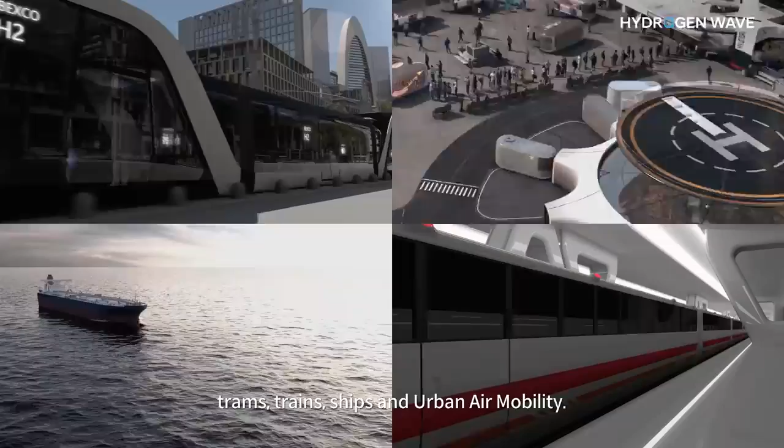In recent years, countries and companies have actively pursued this change by making bold investments in hydrogen infrastructure. Then, what does Hyundai Motor Group's vision for a future hydrogen society look like? Our vision covers not only passenger and commercial vehicles, but also various types of transportation, such as trams, trains, ships, and urban air mobility. Our vision is to apply hydrogen energy in all areas of life and industry, such as our homes, workplaces, and factories.

The goal is to make hydrogen readily used for everyone, everything, and everywhere. With this breakthrough, we aim to help foster a worldwide hydrogen society by 2040. In particular, we will proactively respond to climate change through our hydrogen solutions, starting with the commercial vehicles sector, which emits relatively large amounts of CO2.

Going forward, Hyundai Motor Group will launch all our new commercial vehicles, such as buses and heavy-duty trucks, as hydrogen EVs and battery EVs in the global market. By 2028, we plan to become the first global automaker to apply fuel cell systems to all commercial vehicle models.

Using these hydrogen commercial vehicles, we will promote the complete transition of Korea's public transportation and logistics systems to hydrogen-based solutions. This will be a good model to follow for countries around the world. To achieve this, we are planning to introduce a new fuel cell system in the near future at a reduced price and volume, with significantly improved durability and output.

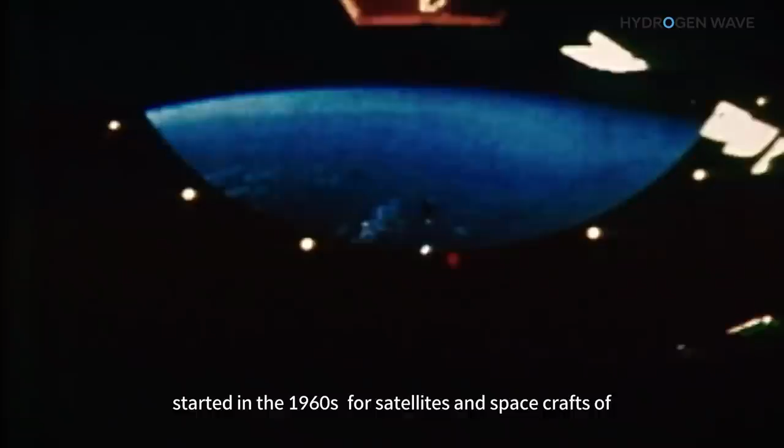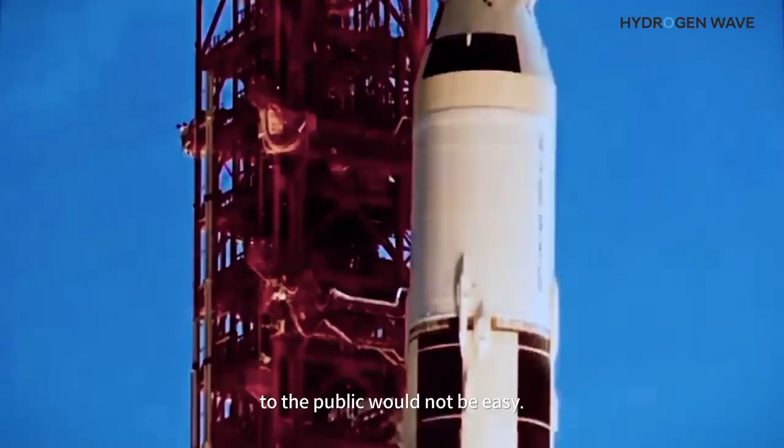Hello, this is Albert Biermann. When did the hydrogen fuel cell start its career? The first remarkable application of hydrogen fuel cells started in the 1960s for satellites and spacecraft of the Gemini and Apollo programs. We expected that bringing hydrogen fuel cells to the public would not be easy.

Nonetheless, Hyundai Motor Group anticipated the future potential of hydrogen fuel cells at an early stage. In 1998, Hyundai started to develop a hydrogen fuel cell car and has made continuous efforts to achieve significant progress to the present day. In February 2013, the Tucson FCEV was released for the first time in the world, opening the door to the mass production of fuel cell EVs.

Then, in 2018, Hyundai released the next-generation hydrogen fuel cell SUV, Nexo. Our Nexo is ranked as the FCEV with the most sales worldwide. But we didn't stop there—we plan to use our fuel cell EVs in various fields.

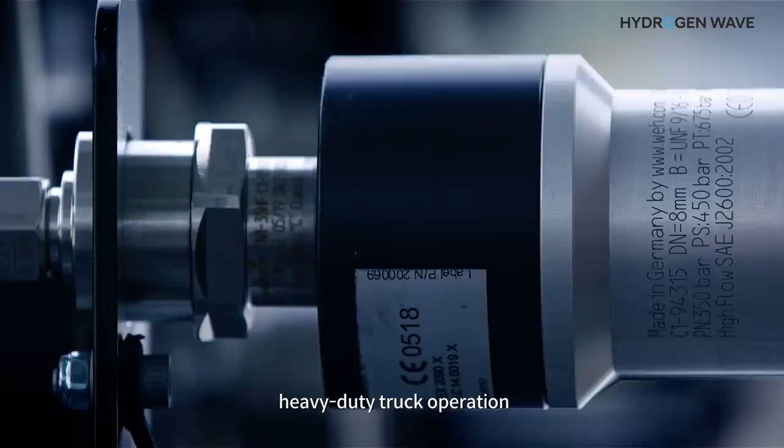First is the key to logistics: trucks. The big challenges in long-haul, zero-emission, heavy-duty truck operation are refueling time and range. The zero-emission powertrain of our Xcient fuel cell truck consists of two Nexo fuel cell systems, a hybrid high-voltage battery for energy recuperation, and a powerful electric motor.

Our Hyundai Xcient fuel cell truck is the first mass-produced heavy-duty fuel cell truck in the world and started operating in Switzerland last summer. Our fleet keeps growing, and we currently have 45 Xcient fuel cell trucks on the road. They cover over 210,000 kilometers of zero-emission operations each month and avoid an equivalent of over 130 tons of CO2 every month.

We are remotely monitoring each of our Xcient fuel cell trucks like a Le Mans race car, using our latest smart vehicle monitoring technology. So far, my engineers are very satisfied with the performance, the efficiency, and reliability.

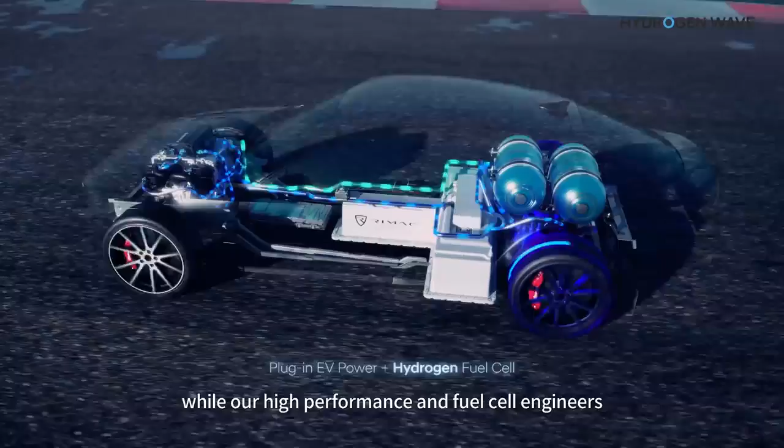So, we decided to collaborate with Rimac Automobili, in which Hyundai Motor Group invested in 2019. For this Vision FK prototype, we developed the power electric system with Rimac, while our high-performance and fuel cell engineers developed all other systems of the Vision FK prototype.

Here's another use case for hydrogen. Production, storage, and transportation convenience are important for the widespread use of the hydrogen fuel cell as an energy converter and power generator.

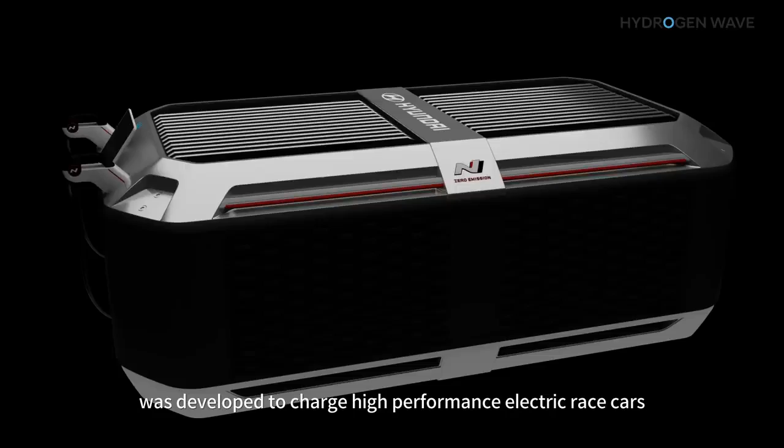This is our first H2 portable hydrogen fuel cell power charger. This powerful zero-emission charger was developed to charge high-performance electric race cars that are participating in electric touring car racing, the ETCR.

Infrastructure and temperature independency, immediate and dynamic power generation, zero emission, and high reliability also play a key role in producing emergency electricity at remote and sensitive locations where a power supply is difficult.

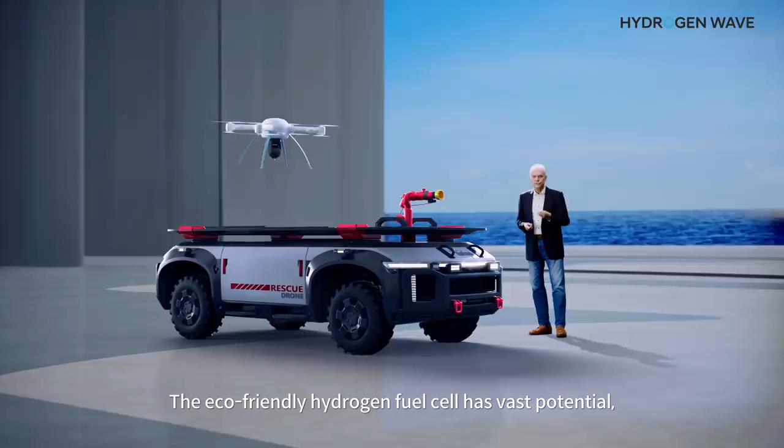Hyundai's hydrogen fuel cell technology is not limited to vehicles. This is an eco-friendly tram that uses hydrogen fuel cells. There is also a rescue drone that can extinguish fires and save lives. The eco-friendly hydrogen fuel cell has vast potential for use in several next-generation forms of mobility, such as trams and UAMs.

Hyundai plans to develop hydrogen fuel cells so that they can be applied to various mobility devices beyond passenger and commercial vehicles. Now, shall we look at the next generation of fuel cell system technology that Hyundai Motor Group is developing? Sehun, please, now it's your turn.

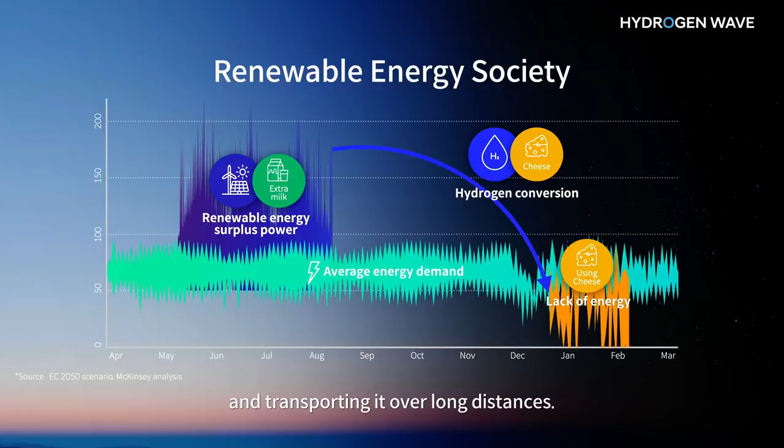My good old Japanese friend, Professor Hirose, once told me that nomads preserve milk as cheese left over from the summer and use it as a milk substitute during winter. When a renewable energy society is established, hydrogen will play a similar role to cheese. Converting excess electricity generated by solar or wind power into hydrogen will be very useful for storing large amounts of energy and transporting it over long distances. So electricity is like milk and hydrogen is like cheese.

See what I mean? Countries around the world are looking to use hydrogen as an energy alternative for a global carbon neutral society. European countries and the United States have boldly announced visions for hydrogen economies and are supporting infrastructure development in transportation and manufacturing. But many people still wonder about hydrogen technology and are skeptical if it could really be used in everyday life. Today, let me show you that fuel cell is a proven technology that can deliver the benefits of hydrogen to people around the world in various fields.

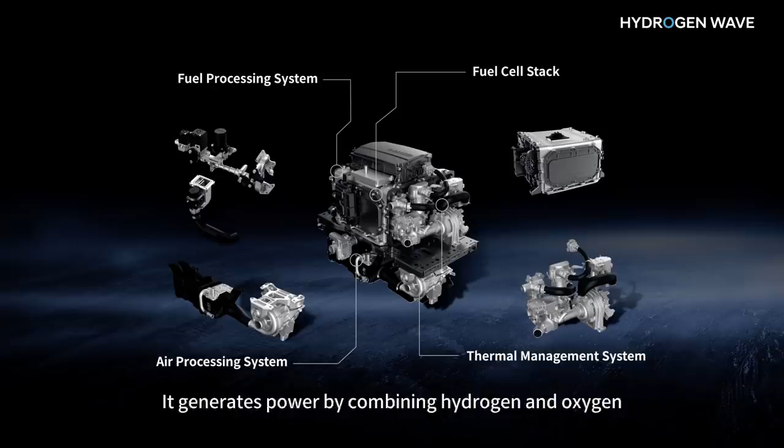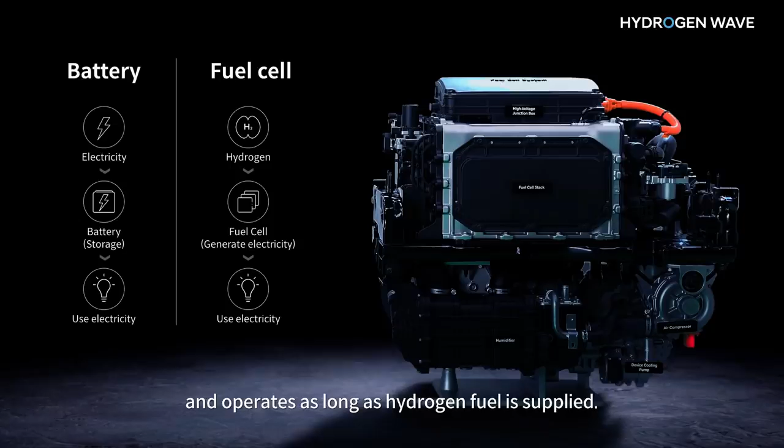Basically, a fuel cell is a power generator, like an engine. It differs from a battery, which stores electricity. A fuel cell system consists of a fuel cell stack that generates electricity, a hydrogen supply system, an air supply system, and a thermal management system. It generates power by combining hydrogen and oxygen, similar to the engine of an internal combustion vehicle, but without the carbon emissions. Unlike a battery that passively stores energy, a fuel cell system produces energy through chemical reactions and operates as long as hydrogen fuel is supplied.

The science is simple. Fuel cell is just a reverse reaction of water electrolysis that many of you learned in school. As recently as 15 years ago, many people still had doubts about hydrogen fuel cell technology. Its success depended on miracles in 4 areas: hydrogen production, hydrogen storage, fuel cell technology, and infrastructure. At that time, I fully agreed that resolving these 4 challenges would not be easy. However, since then, Hyundai Motor Group has undertaken the challenges and hasn't given up.

Today, clean hydrogen production is one of the most promising means for successfully achieving the European Green Deal, and gigawatt-scale projects have already been announced. Recently, the EU and US announced their plans to support the establishment of hydrogen refueling infrastructure. At least for long-haul commercial trucks, there is consensus that hydrogen and fuel cells will offer the best alternative to diesel powertrains. We are now at the point where we can confidently show you our vision for realizing a global hydrogen society.

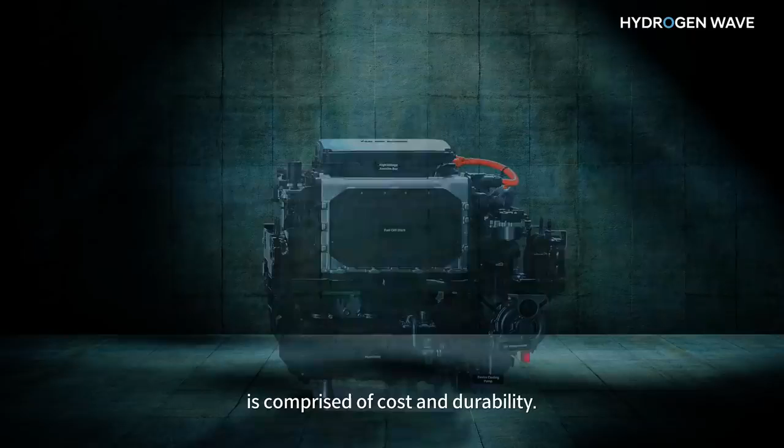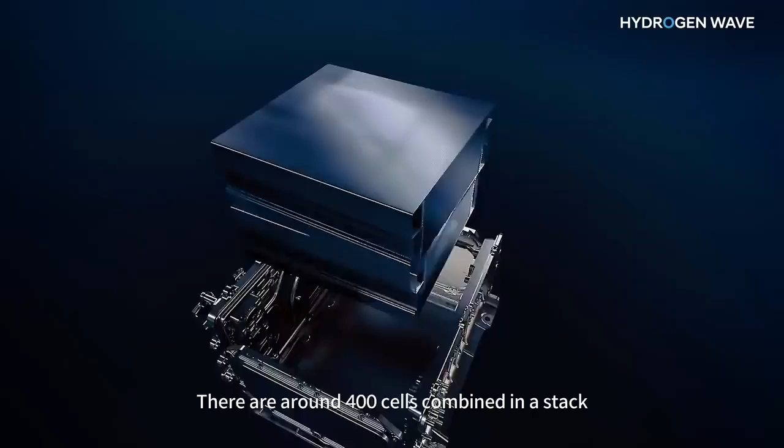The core competitiveness of fuel cell technology is comprised of cost and durability. The most important part for cost reduction is the stack. There are around 400 cells combined in a stack, and the cost of this part accounts for the largest portion. The structure of a fuel cell is shown in the figure.

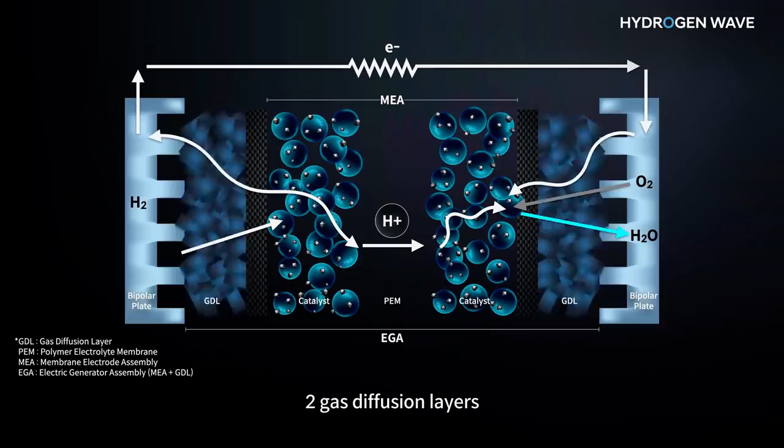The cell consists of 2 bipolar plates, which provide flow channels for hydrogen and oxygen and support the structure of the stack, 2 gas diffusion layers, and a membrane electrode assembly, called MEA. MEA forms the core of a fuel cell and is a key component that generates electricity by causing a chemical reaction between hydrogen and oxygen. Reducing the cost of these components is the key to cost competitiveness.

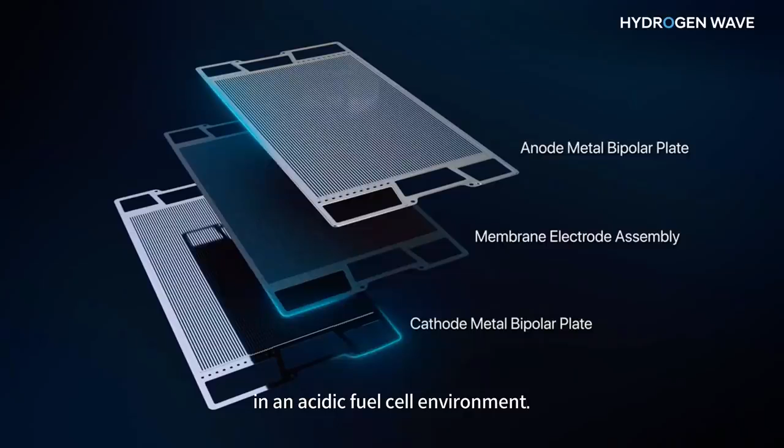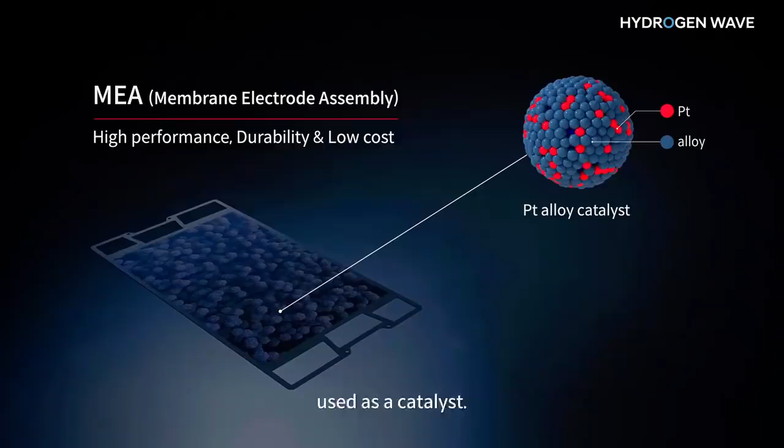In the case of bipolar plates, we have reduced the price by replacing the graphite materials with stainless steel. There are worries that stainless steel would corrode and would not last long in the acidic fuel cell environment. But after more than 10 years of development, we are successfully using stainless steel, even without special coating, for cathode bipolar plates. I still hear people saying that fuel cells are expensive because they require a large amount of platinum. That was true 10 years ago. But actually, platinum is not the major cost factor now, and we are steadily reducing the amount of platinum used as a catalyst. Let me show you how the cost of the fuel cell system has decreased.

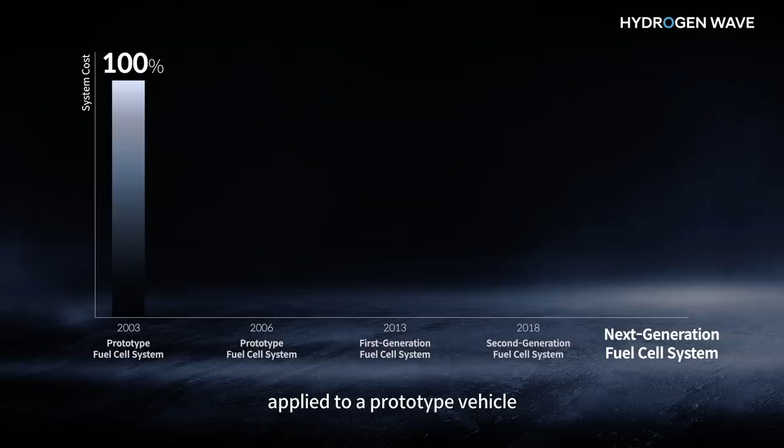In the past, the cost of a fuel cell vehicle was extremely expensive and was notoriously called a $1 million car. For example, the cost of a fuel cell system applied to a prototype vehicle in early 2003 was triple the price of my house in Seoul. However, in 2006, the cost was reduced by half.

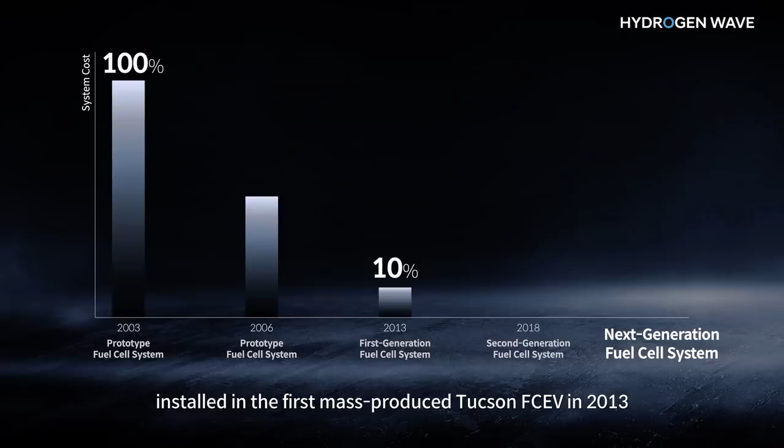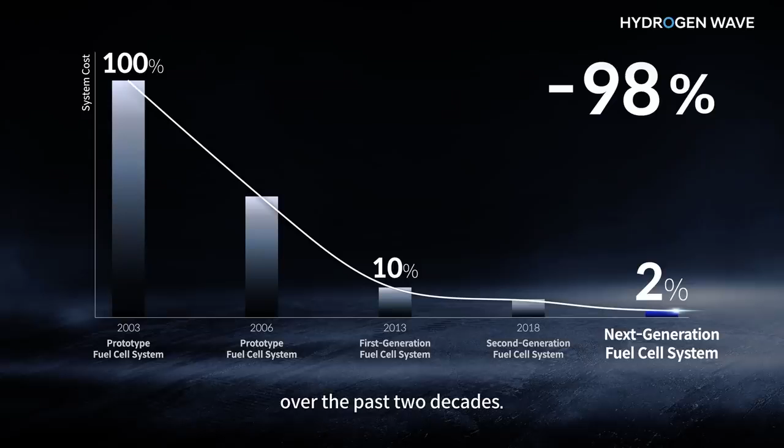The cost of the first-generation fuel cell system installed in the first mass-produced Tucson FCEV in 2013 was reduced to about 10% of the first model developed 10 years before. As you can see in the graph, fuel cell costs have been reduced by nearly 98% over the past two decades.

However, the fuel cell vehicle market is still at the early stage of development. Only 10 to 15,000 fuel cell vehicles are produced per year, and we are not yet benefiting from economies of scale. In comparison, there are 4 to 5 million EVs and nearly 100 million ICE vehicles produced per year. So we still have work to do.

Our goal is to achieve cost competitiveness comparable to that of EV batteries by 2030. I also want to point out that durability improvements are progressing at a fast pace. Durability of a fuel cell system depends on various chemical conditions, which makes durability more difficult to ensure.

During 2004 and 2009, the US Department of Energy launched a fuel cell vehicle demonstration project in order to verify the durability of fuel cell cars. The average durability of the fuel cell stacks at that time was only 821 hours, which is only 1.5 years of durability. This was another reason why people doubted that fuel cell technology could be commercialized.

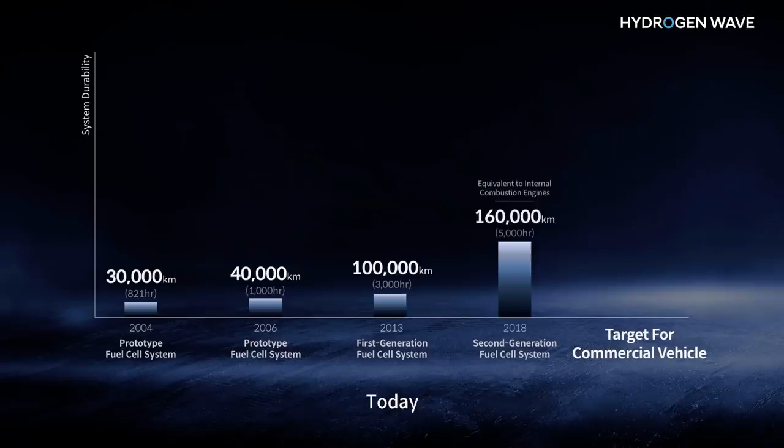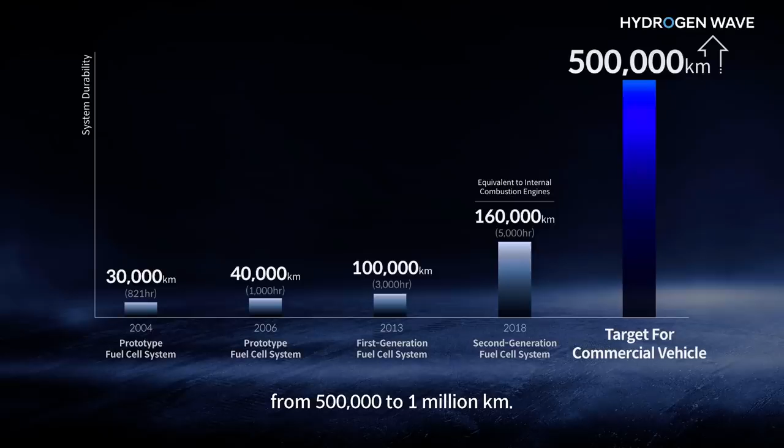Today, the industry standard of durability is 5,000 hours, which corresponds to a 10-year life cycle of passenger cars. For commercial vehicles, the durability requirement is much tougher, from 500,000 to 1 million kilometers. I'm sure this requirement can be achieved in the near future by using better materials engineering and operation technologies.

We are focused on achieving cost reduction and improving durability throughout our development activities.

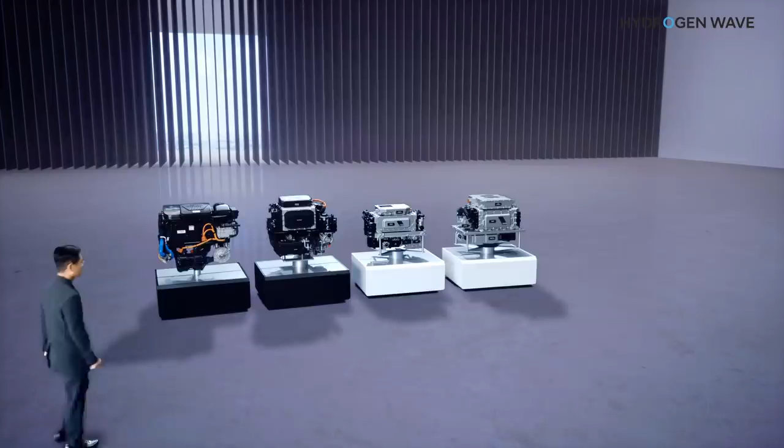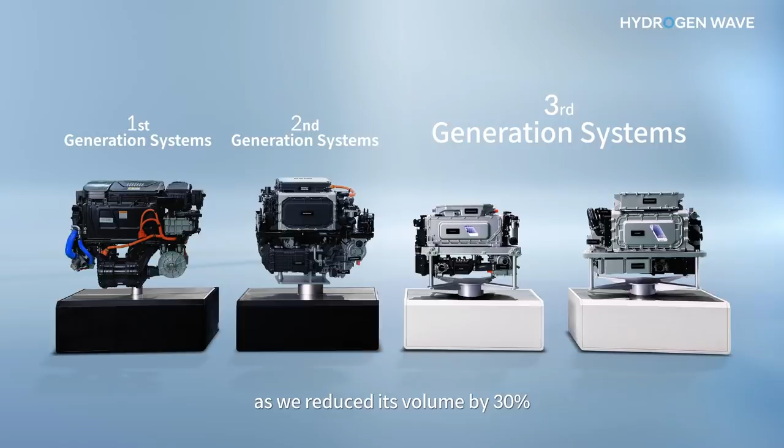Today, I'm going to share details about the next generation fuel cell system that Hyundai Motor Group will launch in the near future. It's a third-generation system under development to succeed Nexo's current system. The one on the left is the 100 kilowatt class system, and the one on the right is a 200 kilowatt class system. Compared to Nexo's system, the 100 kilowatt version is significantly smaller, as we reduced its volume by 30%, which ultimately improves vehicle packaging.

Compared to Nexo's system, the 200 kilowatt version is almost the same size, but twice the output. This version was developed for commercial trucks. By using 2 systems per truck, we can provide around 350 kilowatts, which is equivalent to the power of current diesel engines. We have arranged the first and second generation systems here for your reference.

It is easy to see the difference. In 2013, it was about this size. We had difficulty putting this system in the vehicle, as you can imagine. But the system applied to Nexo in 2018 was reduced in size like this. The third generation system to be applied in 2023 is this size.

It's still in the prototype stage. So by the time it goes into mass production, you will see a system with a much more refined level of completion. The fuel cell power module

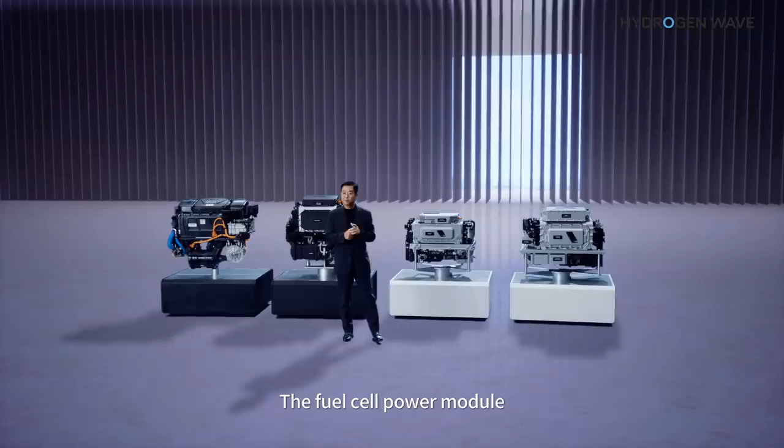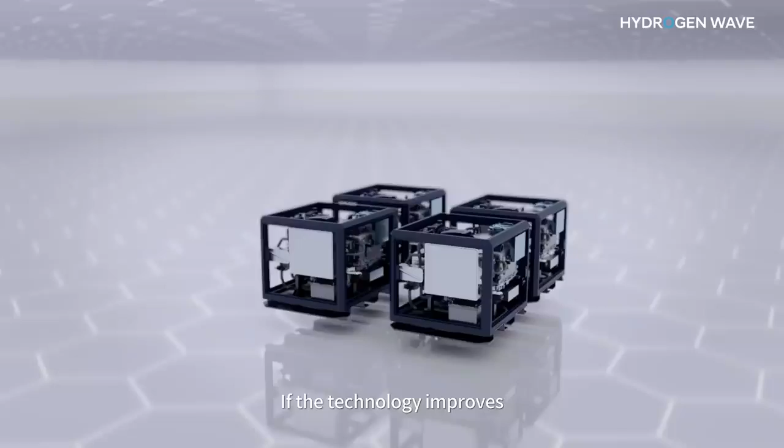is a system that's being promoted for the development of megawatt scale power generation systems. It is possible to provide various outputs, such as 500 kilowatts and 1 megawatt, by expanding several 100 kilowatt unit modular systems. If the technology improves, it can be assembled like Lego blocks to produce high capacity output. Just imagine the possibilities.

Some people say that replacing conventional power systems with fuel cells is easy, but they are wrong. Other people say it's impossible, but they are also wrong. It's very challenging, demanding us to exert unprecedented efforts, but we are confident that it's possible. And we, Hyundai, will pave the way for the global hydrogen economy with our fuel cells powered by H2. Thank you for your interest and support.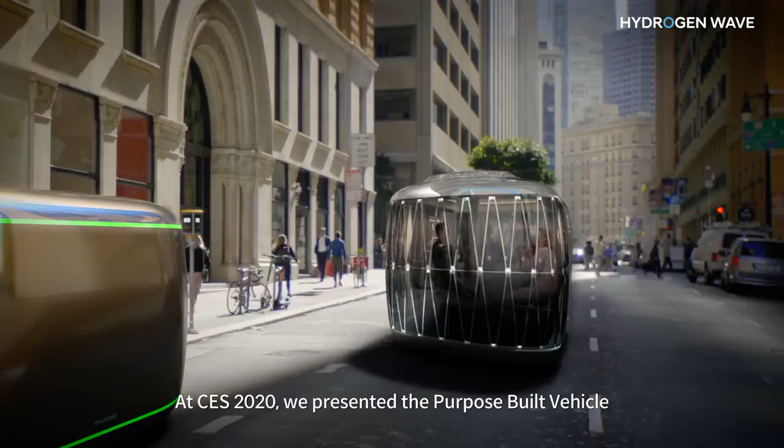We have been researching for some time now. Back in 2019, we introduced our vision of a hydrogen fuel cell commercial vehicle with the Neptune concept. At CES 2020, we presented the purpose-built vehicle, pushing the boundaries of what is possible when systems go fully autonomous.

This blank design slate is a never-before-experienced dream opportunity, and we put everything that we learned in the last few years into this project. The culmination of that effort is the fuel cell e-bogie.

Creating the e-bogie wasn't as easy as putting one and one together. The requirements of the commercial vehicle were significantly different from that of passenger cars. Who knew? So we had to think completely differently and consider the modularity needed to cover a vast network of the value chain.

Devoid of passengers, we could encase the entire fuel cell system in a dedicated chassis with a fully autonomous system. A steering system could be placed at both the front and rear. What does this do? It enables sideways movement. Lastly, the intelligent package resulted in the entire system being compact enough to sit under the container.

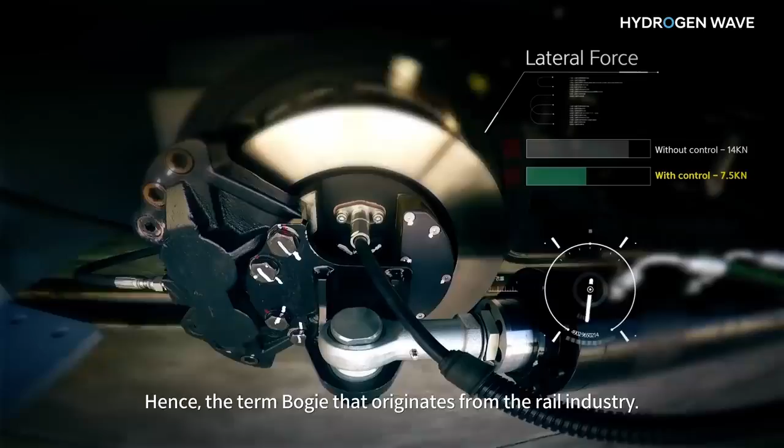Hence the term bogie, which originates from the rail industry. Rail bogies are wheeled frames that sit under every train car. The e-bogie really is more like a smart robot than a traditional car, just like the smartphone revolution.

The fuel cell e-bogie is a platform that offers limitless business application. Large and heavy containers are limited by their size and the space they require to move. But with two e-bogies in a double bogie configuration under a container, they can articulate movement from beneath. It helps them minimize the turning radius or slide sideways into a tight spot.

Logistical efficiency is further enhanced by the cluster mode. This allows multiple trailer drones, or a single e-bogie, to travel together in unison, in an almost train-like configuration. It is a true multi-purpose platform that can be adapted to an even wider value chain.

Container transportation, portside logistics, airport operation, construction, fire and rescue. Ladies and gentlemen: fuel cells, trucks, trailers, and robots. All these businesses can now be supported by a single platform.